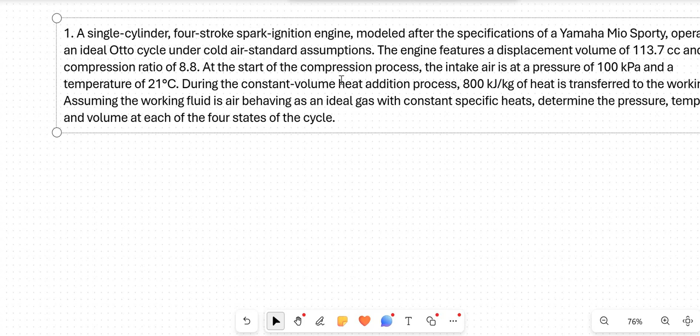Okay, good morning class. So this time, magsasolve tayo ng Otto cycle. Okay. So example number 1 natin, a single cylinder, 4-stroke, spark ignition engine modeled after the specifications of a Yamaha Mio Sporty operates on an ideal Otto cycle under cold air standard assumptions. Okay, so it was stated na yung gagamitin natin na analysis ay cold air standard assumptions.

The engine features a volume displacement of 113.7 cubic centimeters and a compression ratio of 8.8. At the start of the compression process, the intake air is at a pressure of 100 kilopascal and temperature of 21 degrees Celsius. During the constant volume heat addition process, 800 kilojoule per kilogram of heat is transferred to the working fluid. Assuming the working fluid is air behaving as an ideal gas with constant specific heats, determine the pressure, temperature, and volume at each of the 4 states of the cycle.

So siguro, drawing muna natin yung ating PV diagram. Ayan. So ang Otto cycle with process 1 to 2 is constant entropy compression, constant volume heat addition. Okay. So 1, 2, 3, and then 4. So process 1 to 2 natin, S is equal to C ito. Sa 2 to 3 natin, constant volume heat addition. So V is equal to C. Then magkakaroon dito ng QA.

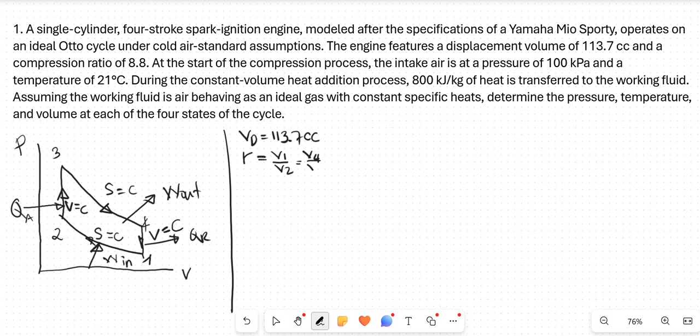Then process 3 to 4, constant entropy ito, expansion. And then dito pala is work in, no? Ito naman is work out. And then process 4 to 1 is QR dito, pero yung process natin dito ay volume is equal to constant. Okay? So given we have volume displacement 113.7 cubic centimeter. Compression ratio, that is equal to V1 over V2. Pareho lang naman yan sa V4 over V3, which is equal to 8.8.

Then yung P1 natin is 100 kilopascal. And T1 natin is 21 degrees Celsius. Convert na lang natin into absolute temperature. Okay, so magiging 294 Kelvin. Ano ba yung ibang given? So yung QA daw natin is 800 kilojoule per kilogram. So yun lang yung given, and then we are tasked to find for P's, T's, and volume. Okay? Sa lahat ng states.

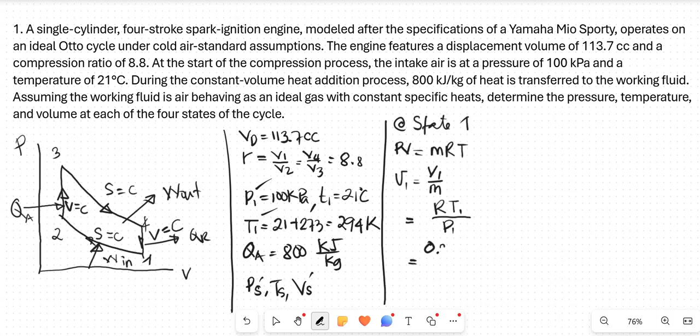V1 is equal to... walang mass, so per unit mass tayo. So gawin na lang natin itong specific volume pala, no? Specific volume ng state 1 is equal to V1 over mass, which is equal to R T1 over P1. Okay? So, ang R ng air in SI is 0.287 kilojoule per kilogram Kelvin. And then T1 natin 294 divided by P1 which is 100 kilopascal. Automatic na ang unit natin dyan ay cubic meter per kilogram, no?